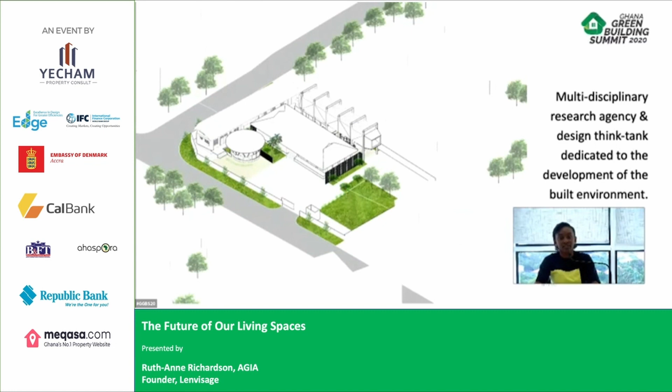We are really focused on being able to develop from the macro, looking at spatial development, looking at urban planning, looking at the details as well. That's just a bit of what we do, showing up on the screen you'll see.

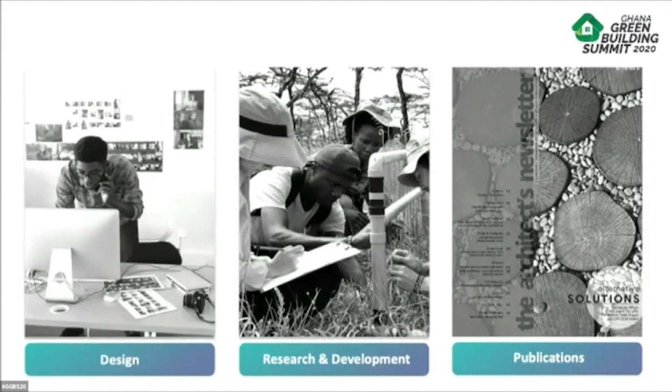So we're going to go into the heart of what we're discussing as living spaces, and we want to see how we can begin this critical discourse. What does it mean for us to envisage a future beyond COVID? I think that was the point of the entire discussion.

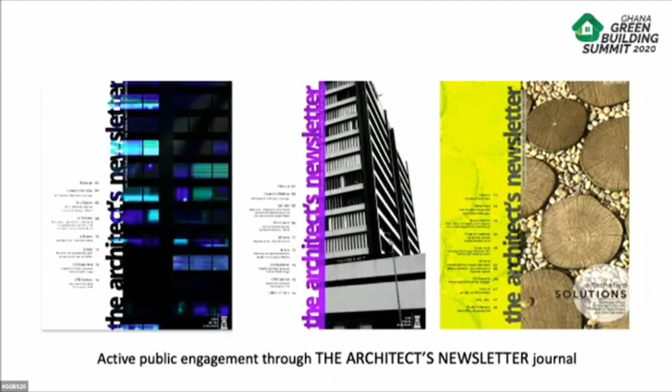Just a bit about what we also do with publications. We like to also focus on the creative aspect, coming through with written publications, and we have a journal called the Architect's Newsletter.

Back to the critical discourse. I think that to be able to discuss anything in terms of the future, you need to be able to look back to what the past occurrences are, and it's something we focus on in our research. We like to look at what has been done before, what was our situation before even COVID, before climate change, and there was a profound statement made by Odile Decq about 4 or 5 years ago.

She simply said that if we really had to think about it, the idea of our world as we know it is something that we'll have to rethink. And so a lot of what we do is to realize that we are in a state of crisis, whether it was before COVID, during COVID, or after COVID.

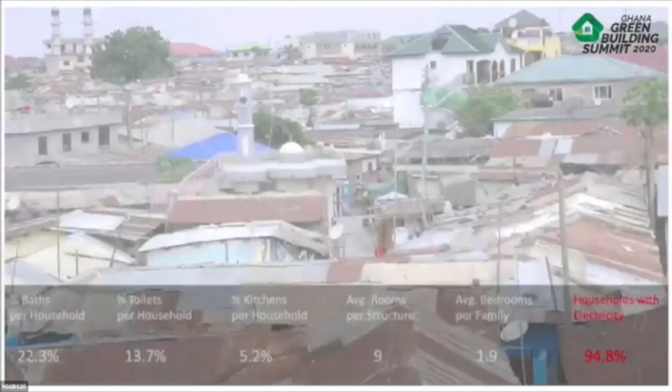You still have the average percentage of households having very limited statistics as far as space is concerned, but each house within that kind of setup or environment has almost 94% being linked on to electricity. Average bedroom per family size is still 1.9, your average room structure is still doing 9. And you look at the kind of social structure that goes with our typologies, and the fact that we're still very much involved in the idea of laterally spreading.

And you realize the whole system just has to overhaul itself. How do we begin to do that, though, is the heart of this discussion.

So with understanding the future of living spaces, we're going to be doing a bit of reconnaissance into the past, and this is what we do as Lenvisage. We take up these research projects into what were our living spaces like 40, 50 years ago, our present what we already know as standard way of operating green buildings, and then what we can take out from that as our future.

This is a research project that we undertook for Kumasi staff housing, KNUST specifically, and it has these treasure troves of really interesting typologies that we felt was interesting to document. We work with a lot of students on these kind of projects.

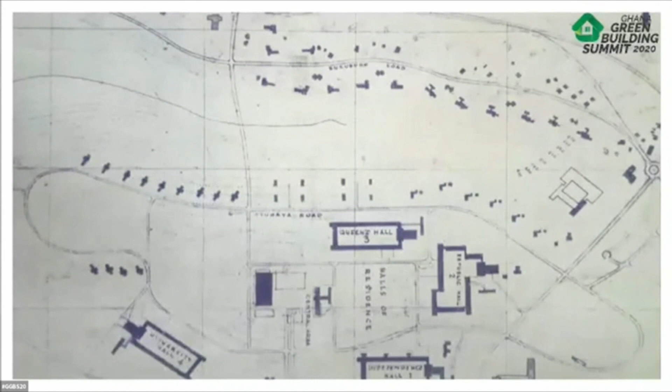This is a depiction of KNUST back in the day. You'll see what we have in terms of the housing arrangements, housing typologies, a lot of focus on passive building orientation, so this clearly shows you that it's been actualized before. We have a lot of focus specifically on passive design because it's the easiest way of confronting the challenges we have set before us, especially in terms of housing.

And design never needs to be that cumbersome. I think the simplest solutions always start with the most basic understanding of what the challenge is. So that's a bit of the work we've done researching how this was made to last and stand the test of time. We're still doing research into the fact that energy consumption 40, 50 years ago is kind of still the same as it is now, which is fantastic for us.

So we will bring it quickly into the present context. This is a project in Chado. It's called the Inside Out House. Really, what this project was seeking to do was give as much connection to the outdoors as you have indoors, and the client was very specific about that.

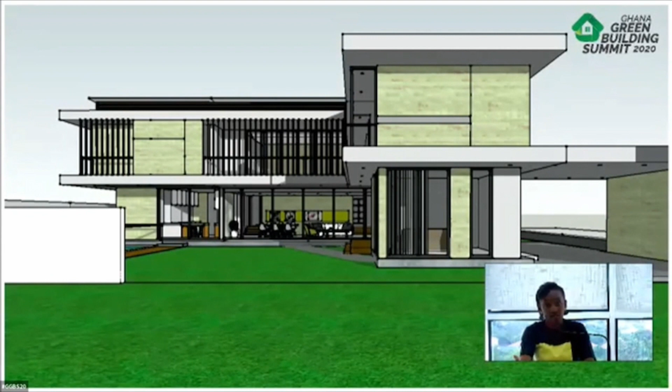But the challenge for us was how do we keep a facade like this, which is purely on the western side, while still respecting the fact that the building has to be responsive and responsible ecologically. So you have a lot of emphasis on your overhangs, on your shading devices. And the main brief was to be able to set out a building that would do almost 50% built to unbuilt space.

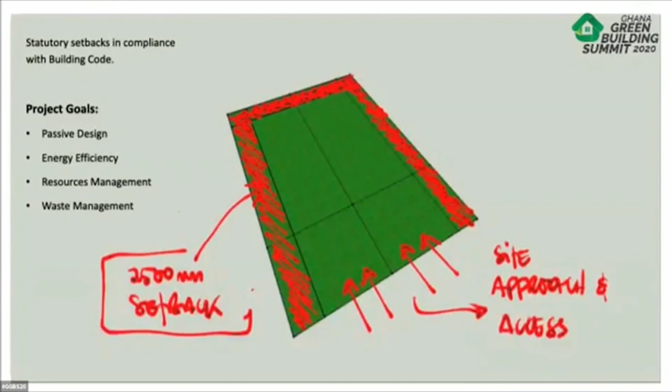So the real challenge came with how do we overhaul this idea of setting the building footprint before the landscaping. We said, let's do this in reverse, let's actually focus on the landscaping, let's make sure we can do as much as 50% unbuilt space. Let's plan out the open spaces and then fit the footprints onto the sites. It worked out really interestingly for us where we could focus on back and front green spaces and dedicate as much as over 200 square meters to that outdoor living space.

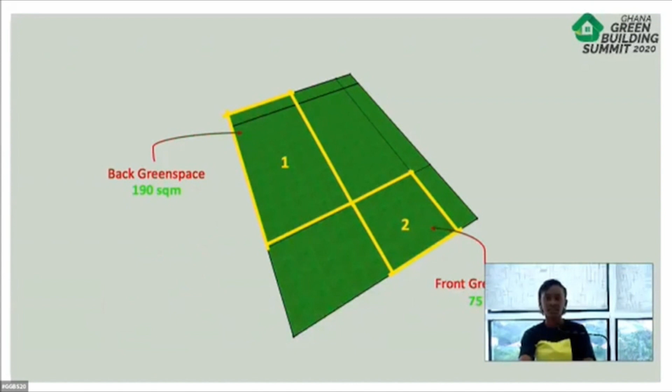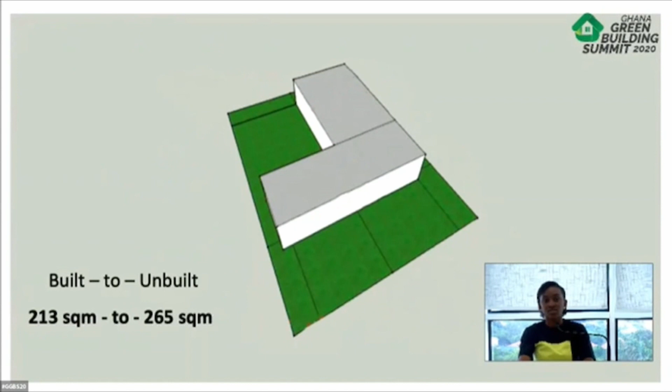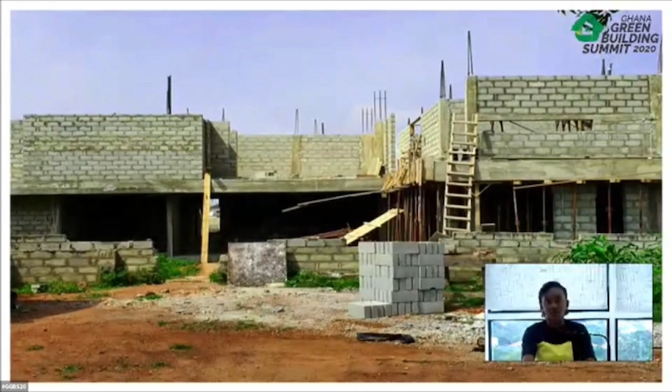So naturally, what you tend to have with that kind of configuration is an L footprint, and we really focused on that to build and develop the massing for this. And we're at the point where we're looking more and more into these sort of easy ways of interfacing with green technology in a passive sense.

This is where we are as of last month. COVID slowed things down just a little bit, but we're very focused on the materiality here. What we tried to do was use blocks that aren't your standard 150 - we're doing 200 blocks, which would really give us the sort of tempering of the indoor climate that you want within a building like this.

Okay, so we're putting all of that together into coming to the focus of this: what do our future spaces, how do we see our future spaces looking like? What do we want for the future of living spaces? And we wanted to discuss this in a speculative project called Plug House.

Plug House is simply looking at units. It's looking at the idea of modularity and coming up with a sense of what it takes to make the living activity work in a space that is very, very tight, very set out in areas that you haven't really been too generous with. It came back to this idea of a 6.6 by 6.6 footprint, and keeping it square and compact really helps with the idea of setting out the unit.

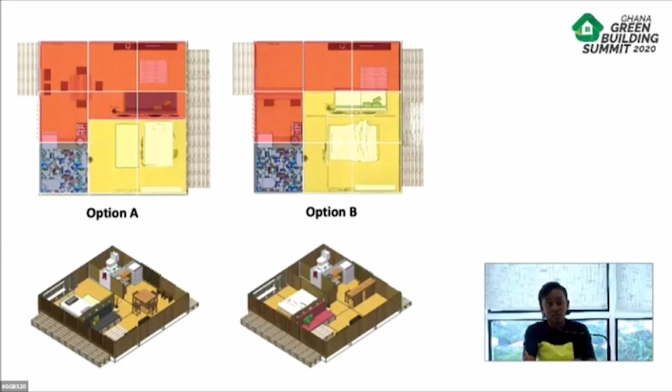So in this kind of discussion, you'll see we've tried to play with typologies within this space, and within each of them you're looking at different cultural variations. How do you begin to develop off a model like this? And what are the sort of proportions you need to keep in mind, making sure that your wet anchor can sort of orient you around.

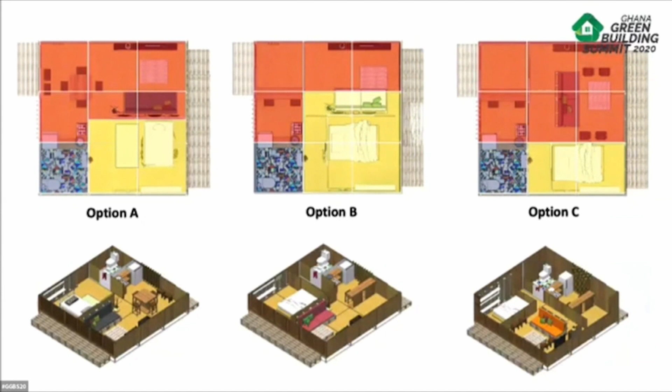And the interesting part for us in this was realizing that you can achieve quite a bit within an area like this. Each mid-grid being 2.2, that's enough space to see a lot of living processes happen - resting areas, sleeping areas, living areas, or the more public areas of the space. And you begin to see how each plane of the building can play a really major role.

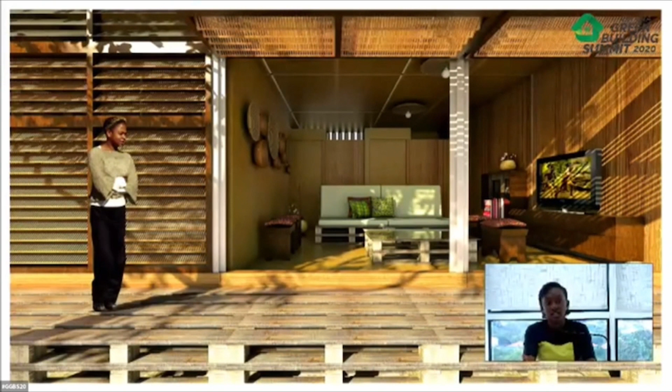So we had a lot of floor to ceilings. We focused a lot on being able to utilize the space, move about the internal partitions to make way for other activities - a lot of flexibility afforded within something like this. I think this is an idea that really works as a basic unit, and then from there we can expand to the larger idea of what future living spaces should be like.

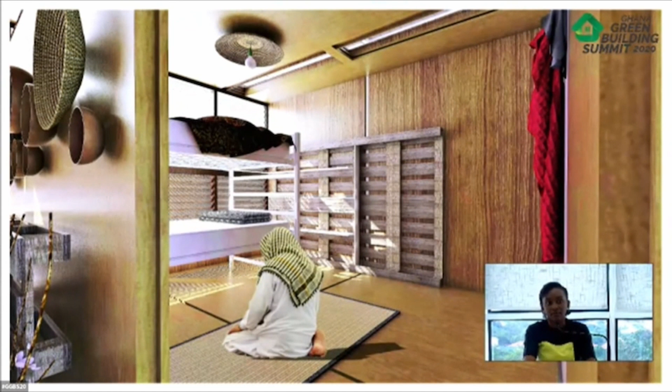But this was sort of sitting it into the context of some of the areas that we'd researched. So, Nima, what's important to you culturally? Is the idea of being able to be exposed to the rising sun something that we have to look at, and so on and so forth.

So those kind of things are things that we want to give some focus to in deciding what we can live within. Okay, so we've already talked about it being modular. We are looking at the idea of it being prefabricated, and we're also looking at the idea of the energy efficiencies of this type of module.

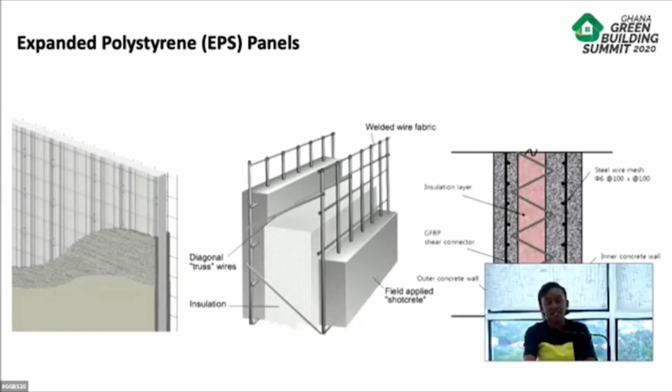And just because we have this focus on materiality being our stumbling block, and the costs involved with a lot of building materials we've discussed, we've happily chanced on this idea of using a system called the EPS. It's quite a bit of work we've been putting into it to make sure we can test this module for mass housing like this.

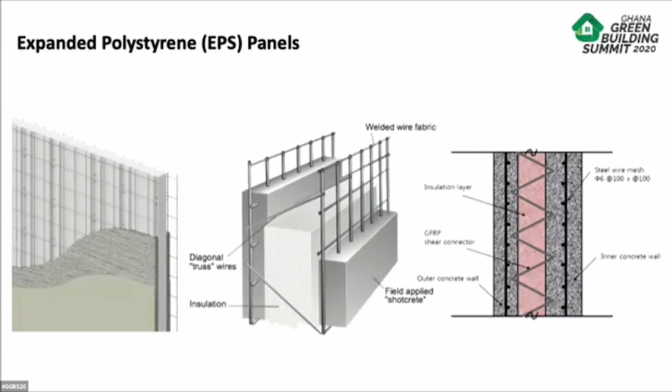So the EPS is simply the expanded polystyrene, the insulation that is sandwiched in between a 3D mesh layer, and it's then shotcreted. It's basically a concrete structure. This gives you some idea of what we've been doing. You work all your services into this idea of the building sheet, and it's as simple as that.

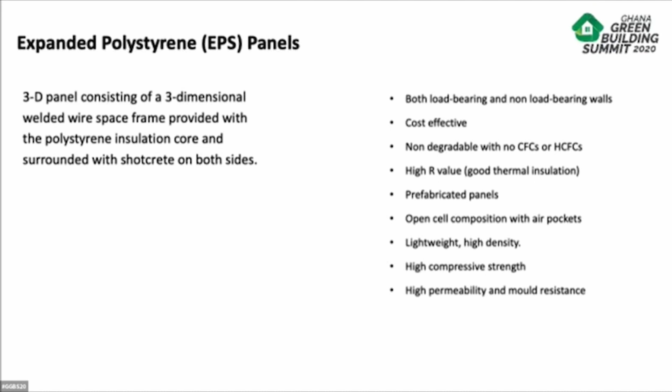But what we've realized with this is we have a really big opportunity to achieve a lot of the things you want for a building envelope. In addition to the fact that you can have load-bearing and non-load-bearing elements within the building, I feel it's more cost-effective, offers a lot more permeability in terms of water resistance, and it's thermally insulative. So you're getting everything within one idea of a structure.

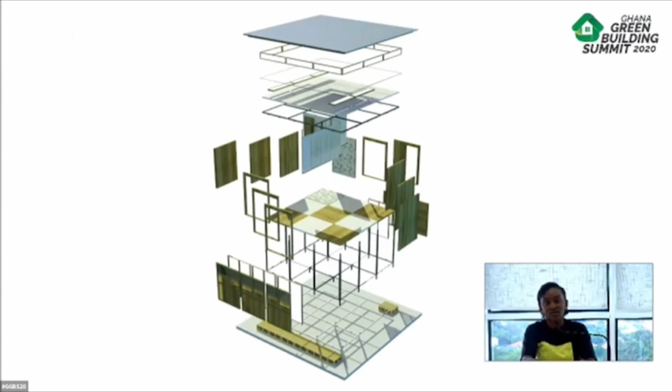We want to see how we can begin to bridge this idea of this material into our housing prototypes, only because then we can do away with the discussion of building at a certain level being too expensive. The idea to do this prefab, this is a 1.2 by 3 meter wide panel, and so it works.

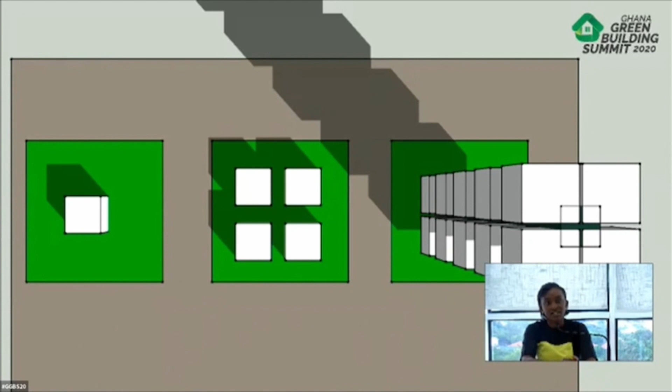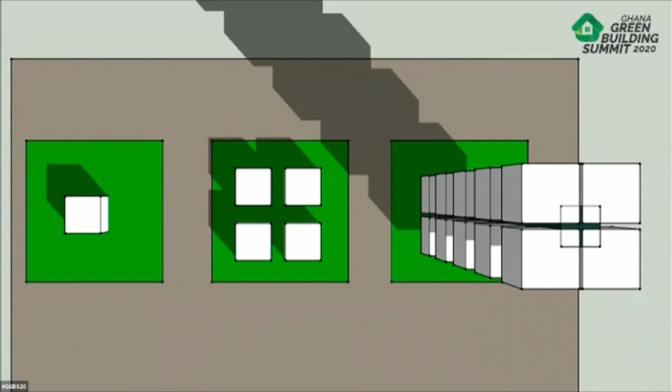But the other aspect of the future of our living spaces is the idea of verticality, and I don't think that's played in enough. This is a schematic showing what we already know, being the sprawl, and how we can condense all of that into the idea of a single spire. We already know the stats tell us we're going to be having to do 190 to almost 200,000 housing units in a year to make up for a 10-year deficit.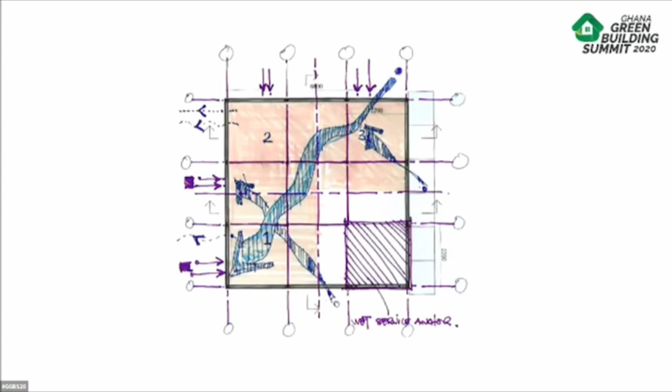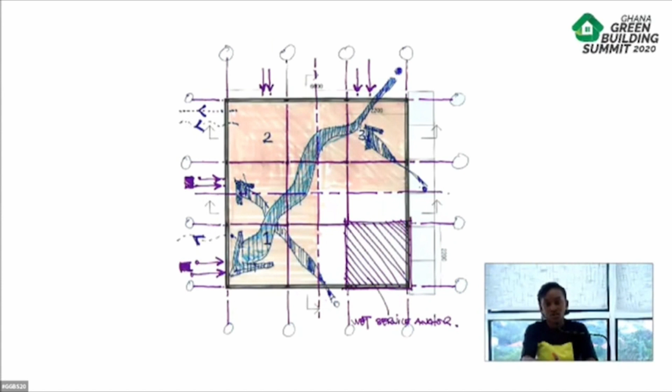So what you want to be able to do within a very short period of time is condense a lot of these ideas of mass housing into one. These are some of the ways we think about the future of space, working a tight unit, making sure you can afford all of those processes going on within that single tight space, but then also beginning to look more at the external linkages and unconventional ways of circulation actually playing in now as part of your living space.

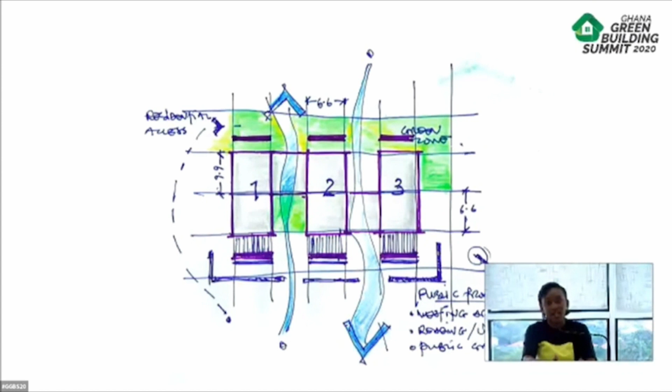So your stair area is no longer your stair area. It's more places of convergence. How do we dissolve this idea of a straight circulation now being more fluid, in terms of ramping, and allowing for a lot of activity and social processing happening within areas like that.

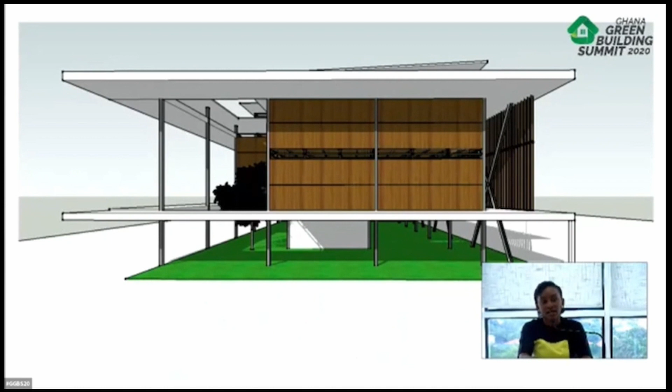So this is the point to which we come up with the development of things and scale it up to the idea of multi-housing. A lot of these are very simple concepts on what we already know to be the way of achieving green buildings, but scaling it up and making sure you can contextualize the conversation a little better.

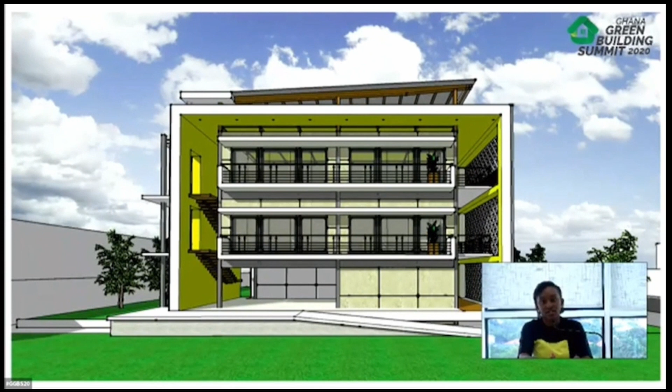So if you're thinking about setting this up in terms of your modules, you're already working with the idea of these cubes coming together, and you have very different typologies in order to play this out. We want to try to do a lot more work in prototyping the basic units, and then expand the idea a bit more.